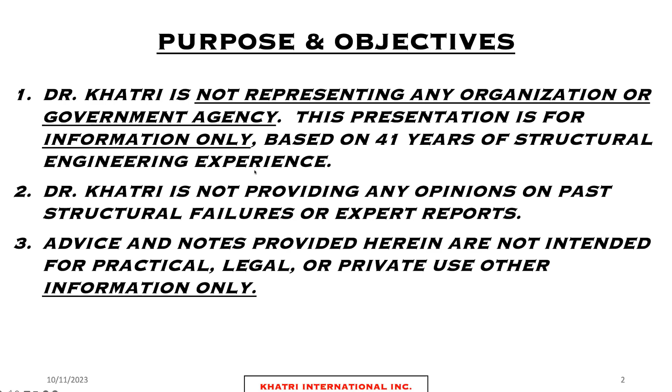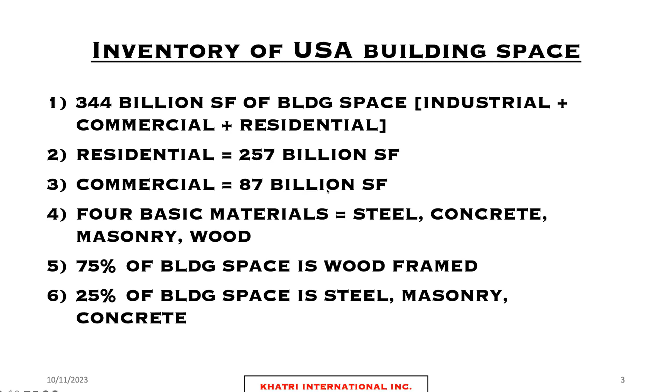So just a quick overview: we have a very large inventory of buildings in this country, 344 billion square feet of space, commercial and residential, out of which residential covers the majority of it, commercial about 87 billion square feet. If we break down the entire infrastructure of buildings in this country, we have 4 basic materials: steel, concrete, masonry, and wood. 75% of our inventory is built from wood, 25% with the rest of it, steel, masonry, and concrete.

So the focus of my talk today is to discuss something that's really not taught to us in school. It hasn't been really researched, and that is the impact of soil movement or earth movement on buildings, on foundations, and on structural performance. Now, we all know that we deal with settlement issues and we analyze for the settlement of piles and foundations, but what effect does it have when those settlements exceed the tolerable limits? And what are the tolerable limits? That's also part of the conversation today.

From an insurance standpoint, it's a very big deal because soil movement, earth movement, as it's called in insurance policies, is normally not covered. It could be covered under a legal case if it's a patent or latent defect. Those are legal terms which deal with time limits. I won't get into the legalities of that, but those of you that have done expert witness work, you have the patent and latent defect time limits, which are 4 years and 10 years in California.

It could be covered as a design defect, could be covered as a construction defect, or perhaps even negligence. But once you get outside of the 10-year statute of limitations, which is, I believe, the latent defect coverage, you are basically not covered. The building owner is not covered for anything that happens from soil settlement.

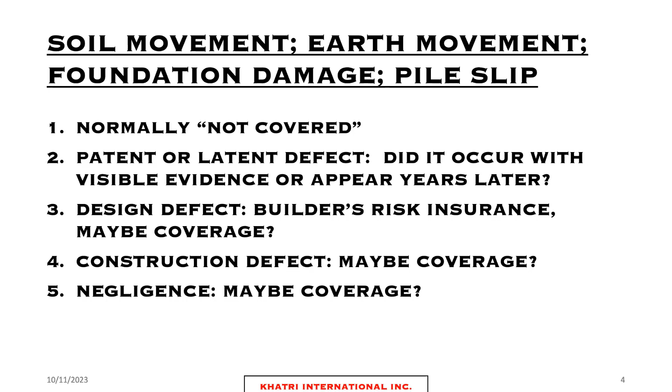So this is a very big deal. I think it's a very big deal, and it goes under the radar of a lot of our studies. And before I get into the technical aspects, I just want to point out a few collapses that have occurred recently, which we're all aware of.

There's the Surfside collapse, and I'm not making any assertions or claims here that was related to settlement, because the cause is still outstanding. We don't know. They haven't issued the final report yet from the National Science Organization. I forgot the name of those guys. Anyway, but look at the impact: 160 people, or I think it's now revised downward to 105 people. There's definitely water issues. Is there sinking of the building, soil subsidence? NIST, there it is. NIST hasn't issued their final report.

We do know that the structural engineer gave warning letters to the HOA 3 years before the collapse. We do know that. So this is a very, very big pending case here that's still open-ended. We haven't come up with any conclusions, and I doubt there'll be one definitive cause, but it's an open file where settlement possibly could have played a role.

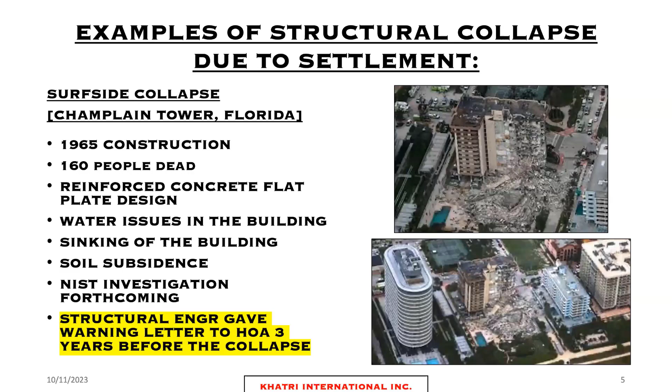And just to look back on history, just to let you know that these things have been going on for quite some time, this happens on large projects, major projects. There's the Kansai Airport in Osaka, Japan, built by the Japanese, which originally was planned to be $8 billion, has turned into $20 billion. And it's basically reclaimed land using 26 million cubic yards of fill. And it's been sinking for the last 30 years.

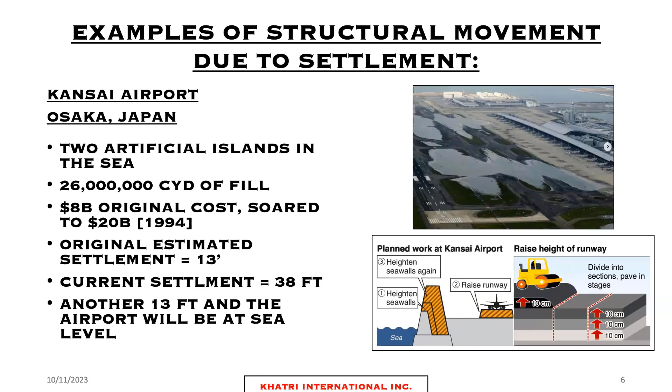It was estimated to sink to 13 feet. It's now sunk over 38 feet. And they just keep filling up the runways in order to raise the runway elevations. So in my estimation, even though that may be a functioning airport, that to me is a fail. Because engineers are supposed to prevent this from happening. So these things do happen on a large scale.

Coming closer to home, we just had the parking structure collapse in New York City. 57 Ann Street parking garage, built in 1925, had a lot of violations. And this has sparked a whole review of all the parking structures in the city of New York. The City of New York has issued a mandatory requirement to have all their parking structures analyzed, which I think should be expanded to include all buildings, because why just parking structures? All of their buildings should be examined.

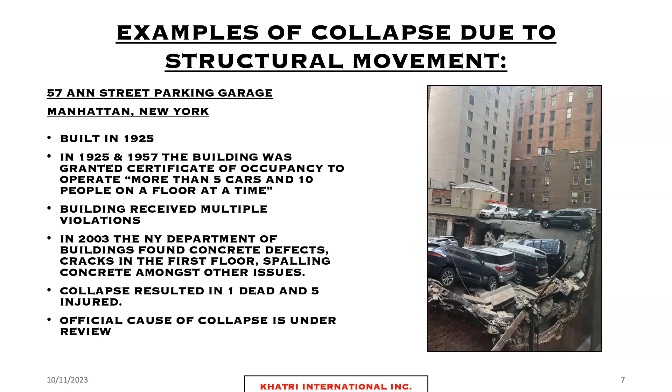But this collapse, again, the cause is unknown. And it was a sudden collapse, and as you can see, quite fatal. 1 person dead, 5 injured. Could be much worse. But New York City has a lot of old buildings. And then we have the bridge collapse in Pittsburgh, which again, we don't know the cause. It's still under investigation. This bridge was scheduled for a speech by President Biden on that very date to discuss infrastructure, and the bridge collapsed in the morning.

So my point here, and I could go on, in Southern California, we've had the collapse near Portuguese Bend in, I forgot the name of the location. Sorry, my mind just went blank. Anyway, the houses that slid down the landslide down there in Rancho PV. And that was, again, a sudden collapse.

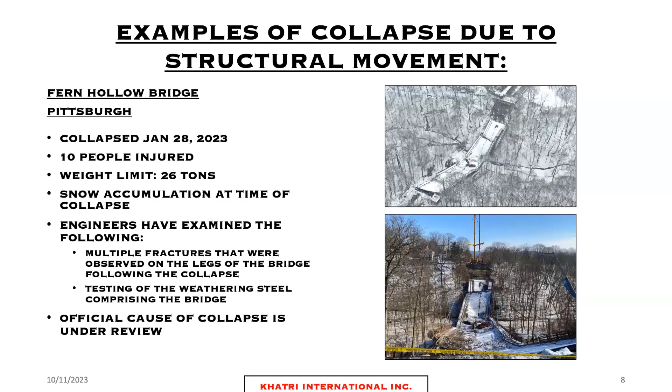So we as an association, I think as an organization, should be actively involved in these investigations, and we really should be asking a lot of questions. Of course, we have to wait for authorities to do their analysis, but I know that as structural engineers, we're very actively involved in analyzing when earthquakes occur, and we should be taking this just as seriously. So let's get into the technical aspects.

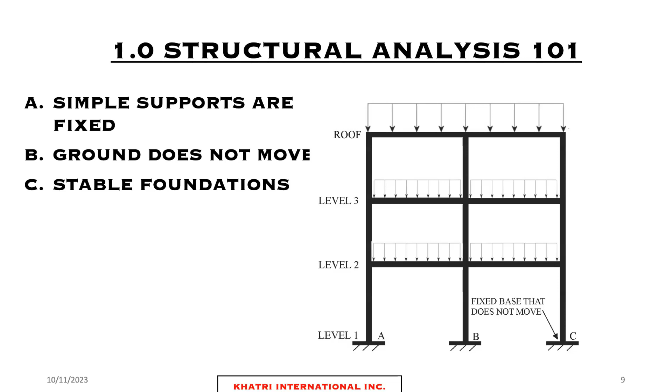So going back to school, we have been taught as structural engineers, in my figure here, that all supports are fixed and the ground does not move. A, B, and C stay level. That's the way we've analyzed everything since college. That's the way all of our exams are taught. That's the way our practice is run. Our industry is based on A, B, and C being level. And I'm here to tell you that they're not.

Okay, so the first reality check is the ground does move. So the reality is that A, B, and C are really 6 degrees of freedom springs. They have 3 translational spring stiffnesses in 3 different directions and 3 rotational spring stiffnesses. So there are 6 degrees of freedom at each base. And if we were to analyze every structure like that, it would be very, very complicated. So I'm not attempting to do that today.

I'm only pointing out that this is a topic that has received very little or perhaps zero attention. I've done quite a bit of research, literature search on this.

And of course, I've been teaching the subject my whole life. There's nothing really out there. There are no papers out there that really analyze what happens when one point goes down because the spring stiffness degrades. And we're going to talk about that today in a very, very simplified way, because I don't have the research funds or the time. I'm a working, practicing engineer just like all of you.

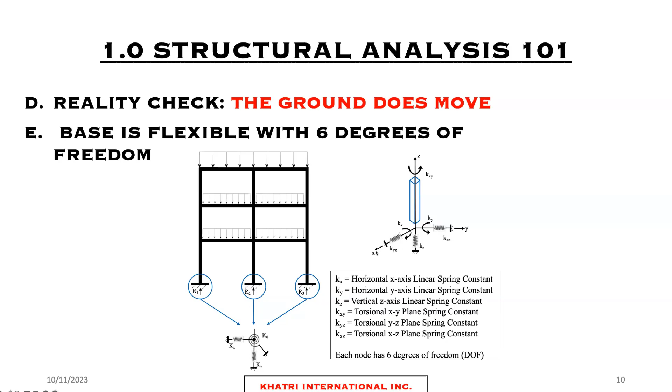To analyze this for all of these effects gets very complicated very quickly. So to do a simplified analysis, just to make the point of my talk, which is what happens when you have degrading spring stiffness on one foundation element, we take a look at a very basic, the first thing that we studied in structural analysis after the simple beam, which was the portal frame. And we have the portal frame here.

And in my analysis work, I actually did do analysis with 3 degrees of freedom. I looked at this portal frame with a lateral spring stiffness, a torsional spring stiffness, and the vertical. I'm saving you that analysis because I found that the vertical spring stiffness was the one that was the most sensitive. So I didn't present the other 2, but they do affect the structure for sure.

So we take a portal frame and we put a vertical spring at point B, which we will start with a very high stiffness value, not quite infinity, but a very high number. You can pick any number, 1,000,000 kip per inch, whatever you want to start with, which basically represents a fixed stiffness. And then we reduce that stiffness incrementally, and we see what happens to the structure.

So you have your textbook analysis with the fixed base, which will give you a symmetrical moment diagram and a symmetrical shear diagram. I don't need to show you that. You all know that. You start with that, and then you degrade the stiffness. And this figure is a little bit incorrect because this node actually remains where it is in vertical alignment. It doesn't slide off to the right. It stays vertical. This, though, does slide to the right. You'll see that in the analysis.

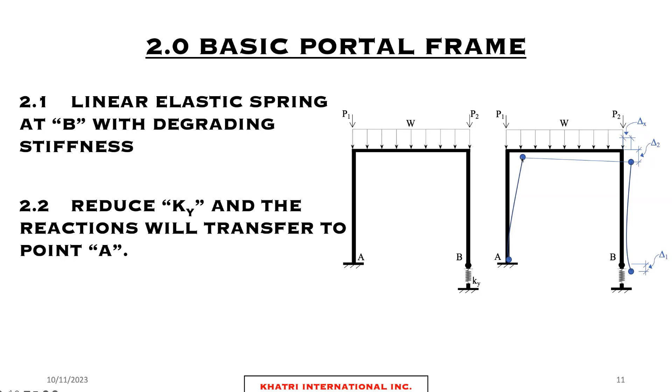So what I did was I took a portal frame, and in order to avoid any legal issues, I'm not telling you from what building it is. I'll just say that it's from a building that recently collapsed. Okay, I'll leave it at that.

And I pulled the drawings and the load. So this portal frame that you see here has the properties from an actual set of drawings from a building that actually collapsed. And it's simulating several stories up above. I won't tell you how many stories, but you get the idea. So we take this simple portal frame. We have 3 degrees of freedom on the right side.

And as I said, I analyzed it for each independent degree of freedom degrading separately. In other words, holding 2 degrees of freedom fixed and then degrading the torsional spring, and then vice versa, holding the torsional spring constant, then holding the vertical spring constant, then degrading the lateral spring. I analyzed all 3 of them on this portal frame.

I'm not presenting the other 2 results, although they did have an impact, but I am presenting the results of the one that had the greatest impact, which was the vertical spring, because that was the one that I thought was the most pronounced, although the other 2 did also have an impact. That had the highest sensitivity rating.

So the analysis, even though the spring may be linear, which in reality it may not be linear, in this case I'm treating it as being linear, and obviously in real soil conditions it could be highly nonlinear, depending on what the soil profile is. So this is, again, a simplification for the purposes of just this very simplified analysis. I'm holding the torsional spring and the lateral spring fixed, and I'm degrading the vertical spring.

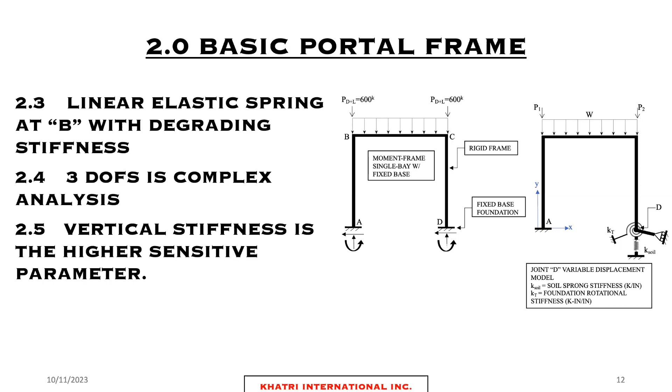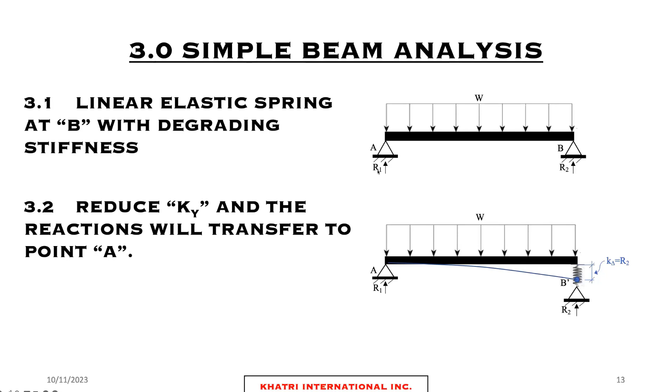And to illustrate the point, we go back to an even simpler analysis, the simple beam, where we are taught in school that point A and point B are stationary. If we relax the stiffness on one side, this will clearly change the moment diagram. It will change the moment diagram if we make it a cantilever beam, same principle. And the stress is going to go to the columns which still have a stable stiffness. This is a fact of physics and of the basic structural performance.

So now, before I give you the results of the portal frame, I want to extend this analysis to a multi-story mid-rise or high-rise, whatever you're working on. I'm primarily focused on frames right now, but the same principle would apply for all other structural systems: shear walls, coupled walls, moment frame systems, the whole gamut. And it would apply to all structures, wood, masonry. The same principle still applies.

So if you take a multi-frame analysis with variable deflections occurring on the base, which is very possible, I've done quite a few structural studies where I have witnessed and measured it, you can only imagine the complexity of what's happening in the frame. Very complicated. But taking that simple portal frame analysis and applying it to a multi-frame analysis, things get very complicated very fast, and you will have amplified moments in joints that were not designed for them. So this is the real world, uneven ground settlement.

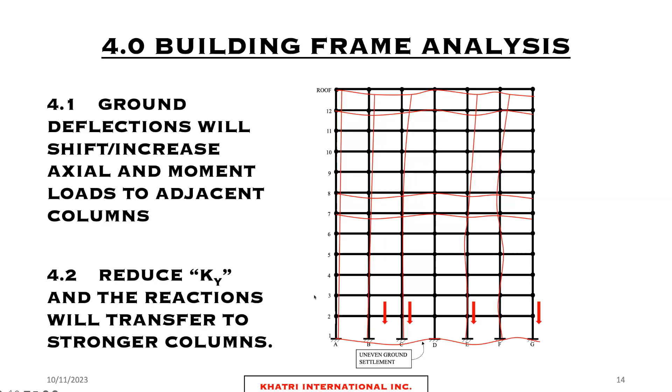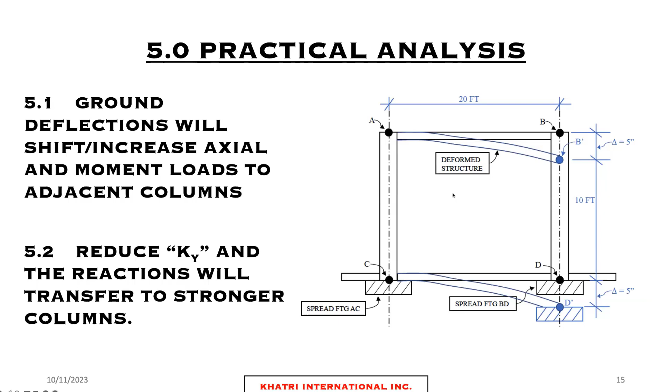Let's go back to our basic case. In our practical analysis, I've modeled my structure and I am reducing the stiffness on one side. All these dimensions are from an actual portal frame from an actual multi-story structure. I did two cases: case A, the fixed base model, which I don't need to present. That's going to have a symmetrical moment diagram and shear diagram. You already know the answer. This is the one we're interested in, where we're changing the stiffness. And what do we get?

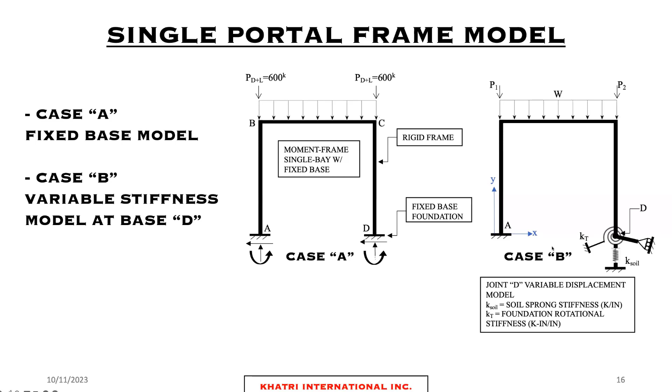And this is just a simple one-bay portal frame, but these loads are real loads. You have 600,000 pounds of force coming in on this column. As this degrades in a multi-frame, the load will get shifted to the other columns. If multiple columns are sinking, those moments will shift to the columns that are not sinking. And by sinking, I mean relative sinking. If the whole building sinks uniformly, in theory, nothing would happen, right? I don't think so, because there's no such thing as uniform settlement.

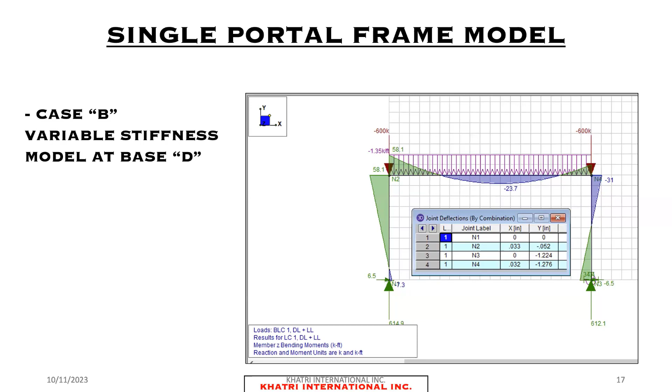But I'm only raising the question. I'm not making any definitive conclusions here. I'm not blaming anybody or saying anything. I want to be very careful in my choice of words. I'm only offering a technical explanation that I think is a viable explanation on a topic that has not really been addressed, and I think it should be addressed.

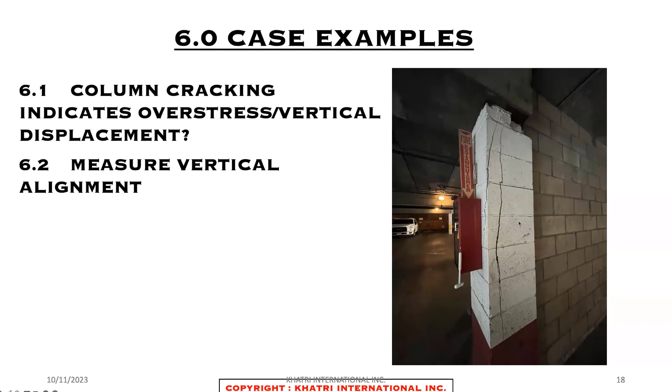We came out there, we looked at this structure, and we found that a lot of these columns are like this, not just this one column. This is the kind of stuff that makes me nervous. Because how do I know, is this a compressive failure or is this column sinking? I don't know. And you can't tell by looking at it. You've got to measure. And you look at some of the other columns in this building. Look at this. And this is the kind of stuff that's not good.

And there's no seismic restraint on these slabs, these beams. So that's another issue, is that this could all fall apart. This was built back in the 80s. And look at the spalling that you have up here.

So we did do an analysis on this building. We did measure deflections. We advised them to do a retrofit, a rather substantial retrofit, to fix this seismic connectivity issue and to wrap the columns, the best we could recommend. Some of the columns we felt needed to be shored. And the bill is coming in quite high. They don't have the money.

Okay, I can't go any further than that. All I can say to them is, look, you've got a problem. You need to deal with the problem. I've done my job. Now, if you can come up with the money, I can help you, but I can't do anything beyond that. But due diligence and our service in our industry towards life safety is very important here. And so I bring it to my colleagues' attention, to your attention, to consider these facts, and perhaps as an industry, we should collectively work together to come up with something to address these issues.

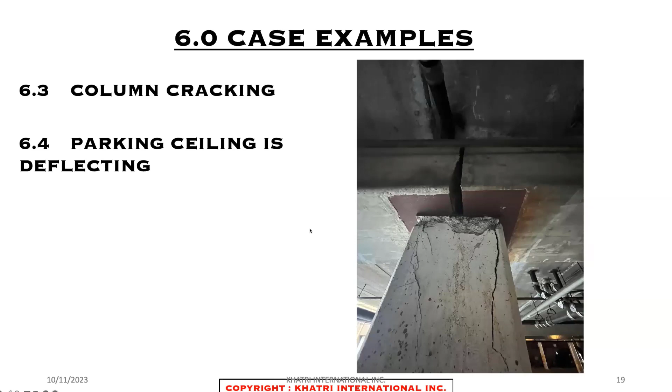So I think I'm way ahead of time. Am I? Okay, well, that's fine.

So my conclusions here are that footings, foundation settlement is a potential cause of failure. We can't say for sure without having measured data. I am advising that structural monitoring is essential in some cases in your structural assessment. Column alignment is important because if a column is not vertical and it's leaning, oh my God, that's a big issue because it introduces P-delta effects and all kinds of other problems that you know about. And slab deflection needs to be measured.

I focused primarily on reinforced concrete in this talk, but it's the same thing for steel buildings, and I have steel building examples that I could share. I just wanted to keep this very simple. Wood frame buildings, again, going to Rancho Palos Verdes, where they had the landslide situation, obviously the same exact topic applies there. Even though those are single-story or two-story buildings, so-called light frame, the foundation displacement affects the structure. And we normally are not measuring these things, and I think we should be measuring them.